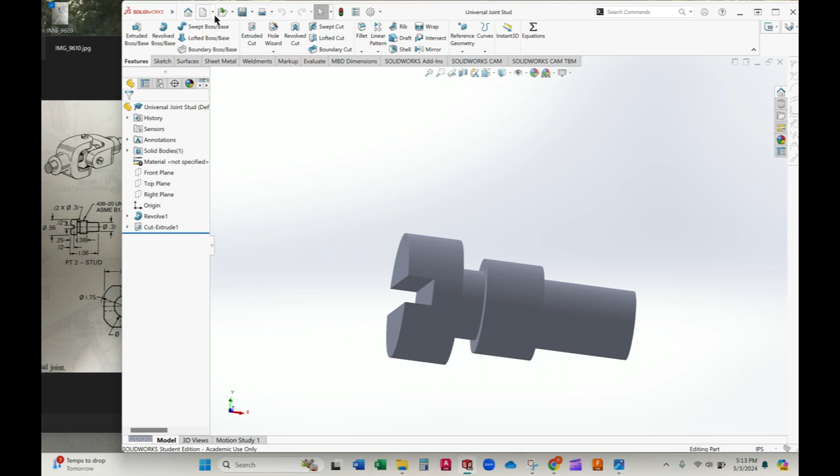Once they're open, I'm going to come up here to New, choose Assembly, and since they were already open, they show up here in this window. The first thing I want to do is pin this window in place. Otherwise, the first time I drop a part out there, this window is going to shut down, and it's a pain to reopen it. So just pin it in place so you don't have to worry about it.

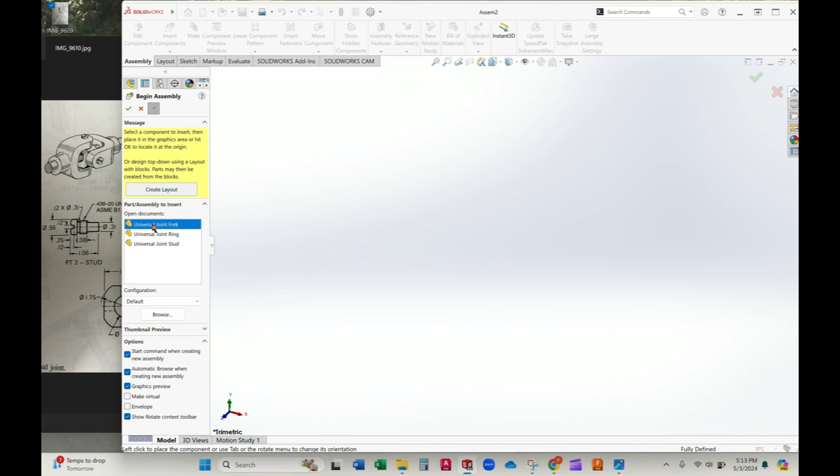I'll pick my fork, bring it out here. I'm going to zoom back a little ways, give myself some space, because these parts are going to take up a little space. So I'll click where I want the fork, and I want two of them, so I'll click a second one in place. Come over here, say next, and I want the ring. Only need one ring, so I'll click where I want it. Next, come over for my stud, and I'm going to need 4 of them, so I'll just make a group of 4 of them. And that's all the parts I'm going to need, so green tick mark to shut that down.

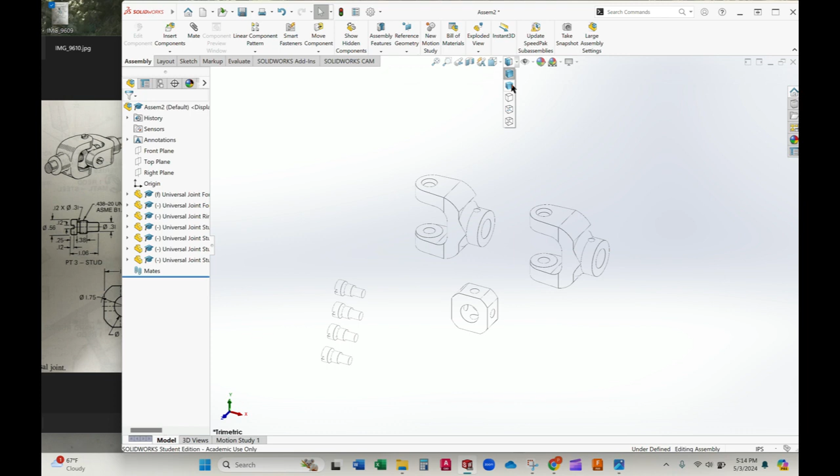I'm going to give myself some shading here so I can see what's going on. Now, all I have to do is come up into my mate window and tell SOLIDWORKS how I want these to be mated together. So the first thing I'm going to do is say I want this center hole to be concentric with this hole here. See, it guessed concentric, that's what I want. But just because it's concentric, see how it can still move up and down?

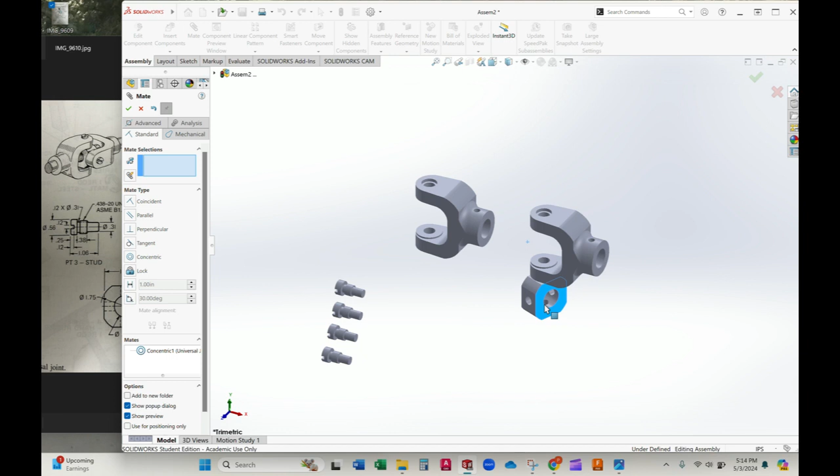So I say I want this surface to be in contact with that surface. There we go, I want them to be coincident. Green tick mark, and that part is now locked in place. It can pivot, but it can't go anywhere.

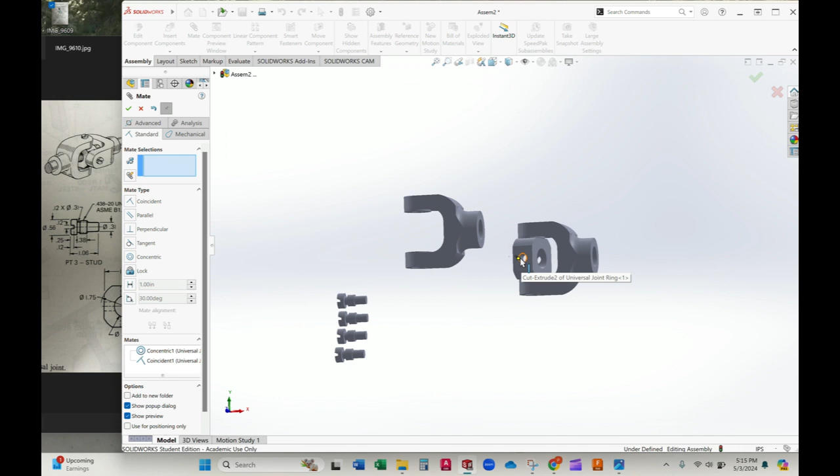Just going to do the same thing with the other fork. So take this hole here, say that I want it concentric with that hole there. But see how they're both facing the same direction? I want this guy facing the other way, and that's what this down here is for, the mate alignment, so you can flip it around. Perfect, so I got them concentric, but it can still move like this.

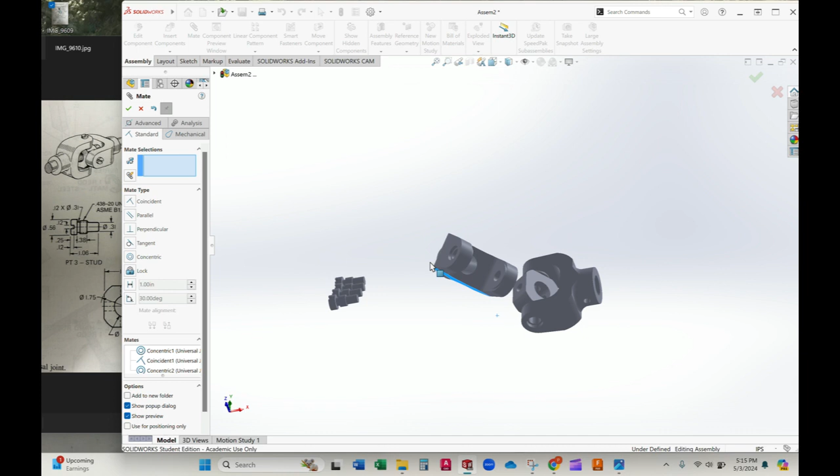So I want this surface to be touching or coincident with that surface. Excellent, now all I got to do is drop these studs in place.

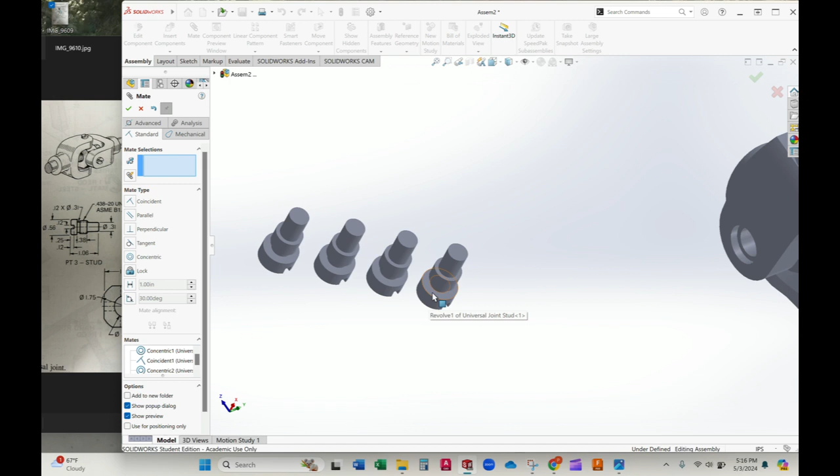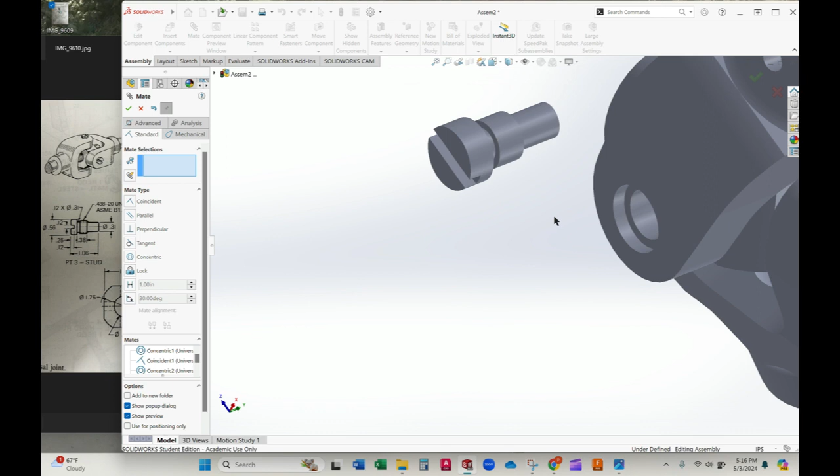For these guys, I'm going to zoom in here and grab this inner surface, the part that's actually going to sit flush when it's screwed in place, and it's actually going to contact this surface right here. So I'll select it, good, I want it to be coincident. Yes, but that just put it on the plane with it, it didn't actually put it in the hole. So now I have to select one of these round portions and say that I want it to be concentric. So all I'm doing is basically the same two moves that put the fork together, just coincident and concentric over and over again.

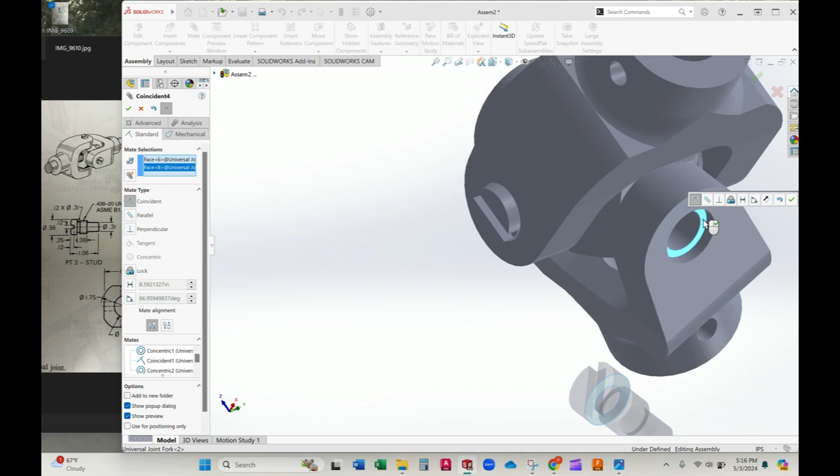So this flush surface here with where it's actually going to sit when it's all put together. Good. Oh, and this one came out backwards, so we have this mate alignment button that flips it around. Perfect.

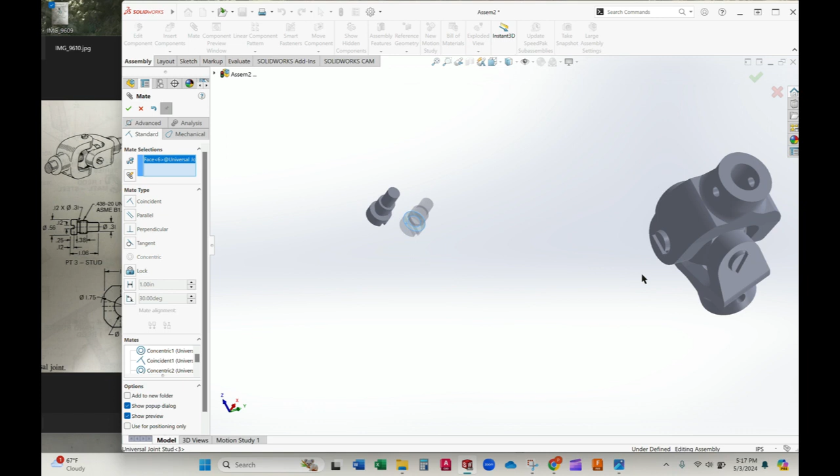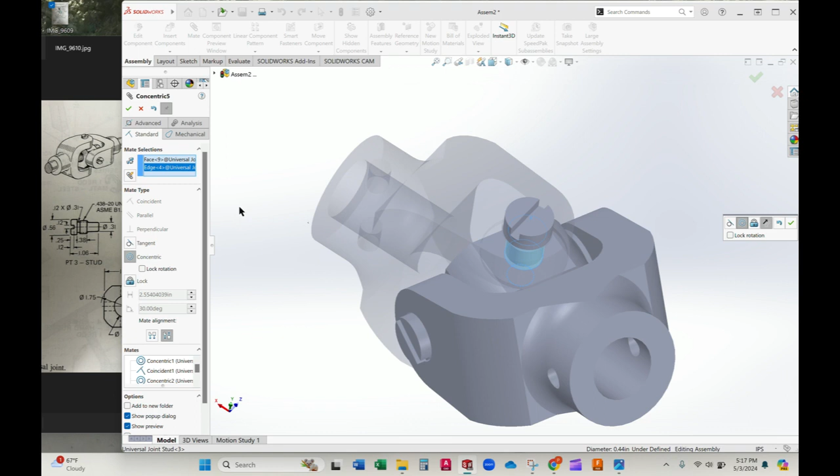So I say yes, now I pick this circular surface, say I want them to be concentric, and now it's right where I want it to be. Come around over here, this surface right there, and it's facing the right direction. See how it's locked on the plane where it's going to end up? So it's on the right plane, it just doesn't know to line up with the hole, and that's where this step comes in. Say make it concentric, and then it knows to be on the plane and lined up with the hole.

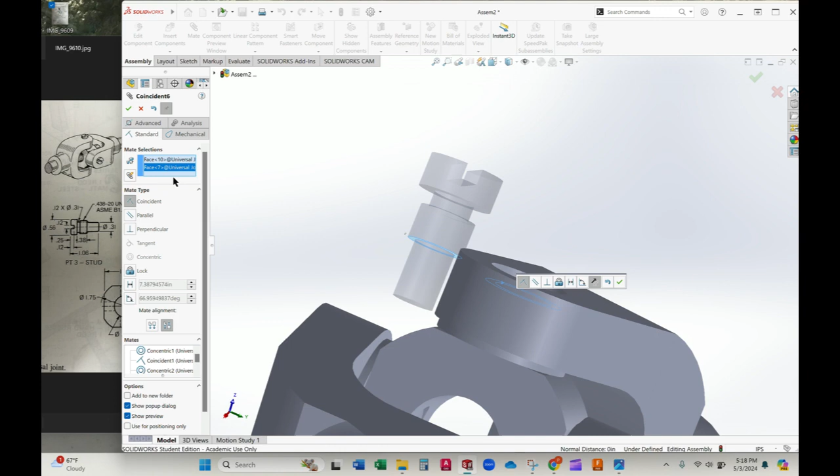All right, get my final stud here. That surface. One in here with that one. Yep, it's on. Oh, I grabbed the wrong surface here, so I'm going to cancel that one and we'll try again.

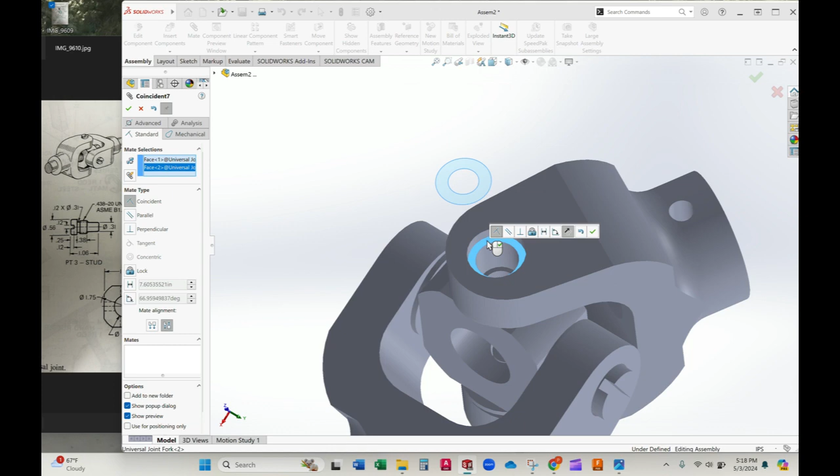Go back into our mate window. That one. Right there, yep, that looks better. Just got to make this guy concentric. And there we are, now our universal joint can move this way.

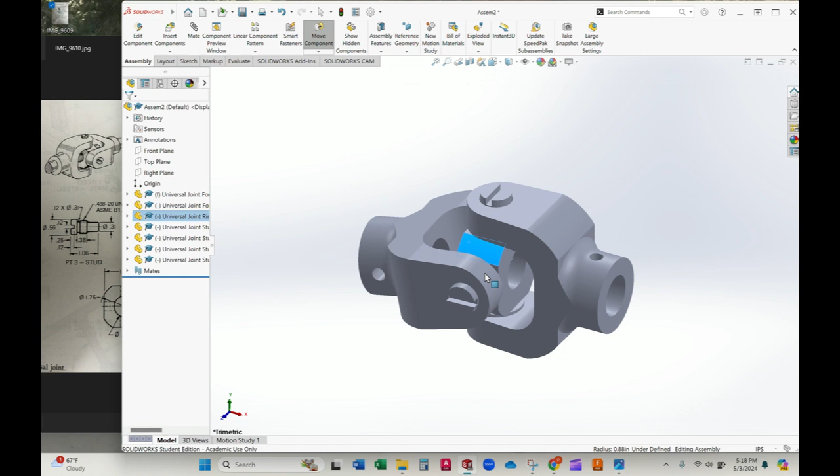If I grab in here, it can move this way, and everything stays together just the way that it should be.